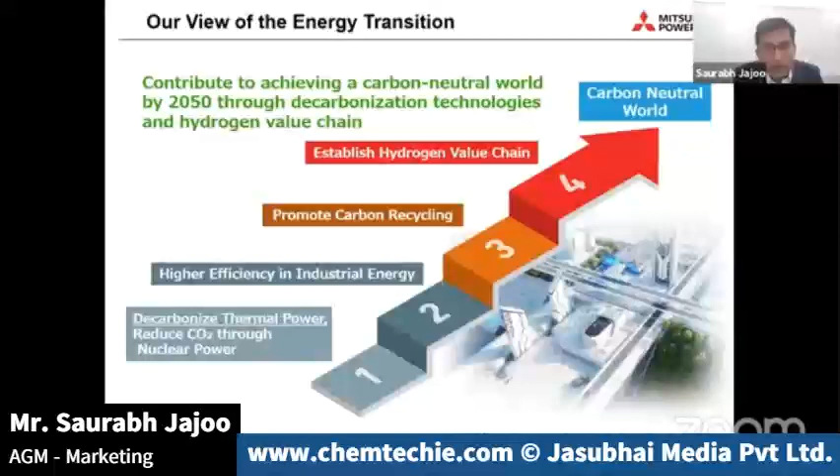To elaborate more on decarbonization, Mitsubishi Power is working on ammonia and biomass co-combustion boilers with a target to achieve carbon reduction to the extent of 20% at least. We also have a fleet of highly efficient gas turbines; our current gas turbines can demonstrate even up to 64 to 65% efficiency.

As we all know, gas turbines, in comparison to coal-based power projects, almost reduce CO2 by 60%, 65%. So basically, with improvements in gas turbine technology and more deployment, we can definitely achieve decarbonization of the coal fleet, and that can be a good contributor. Combining these gas turbines with coal-based power projects, and coal-based power projects with CCUS, will definitely reduce carbon emissions to a great level.

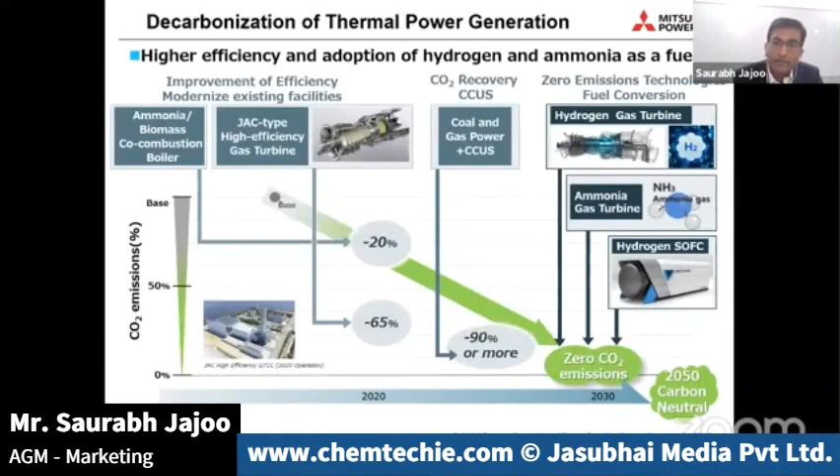And subsequently, as I explained earlier, we have to move towards hydrogen-fired and ammonia-fired gas turbines. Yeah, Mr. Prasad, you can take it further.

In this slide, we are trying to show you the portfolio of gas turbines that we are offering from Mitsubishi. On the right-hand side, you can see gas turbines varying from 41 megawatts in simple cycle to almost 574 megawatts in simple cycle, so we have a wide range of gas turbines in our portfolio. On the left-hand side, you can see the various models plotted against combined cycle efficiency and turbine inlet temperature.

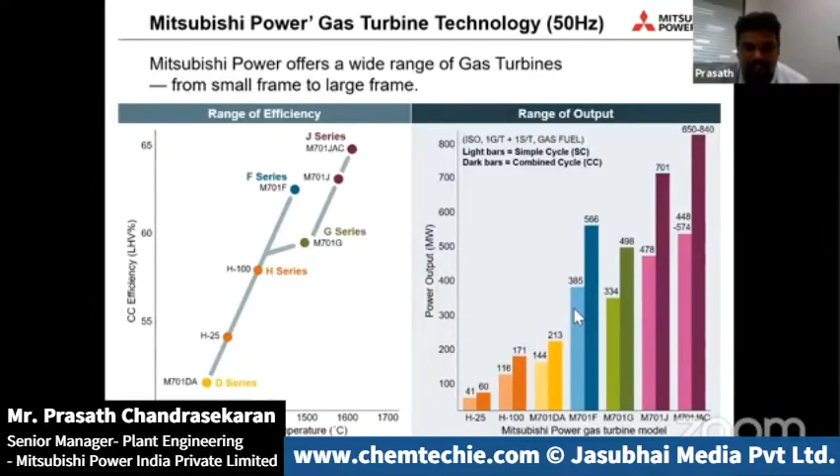If you see the topmost, the 701 JAC gas turbines and J series, you could clearly see that we have achieved a higher turbine inlet temperature of more than 1600 degrees C, which has led to higher combined cycle efficiencies in our advanced frame gas turbines.

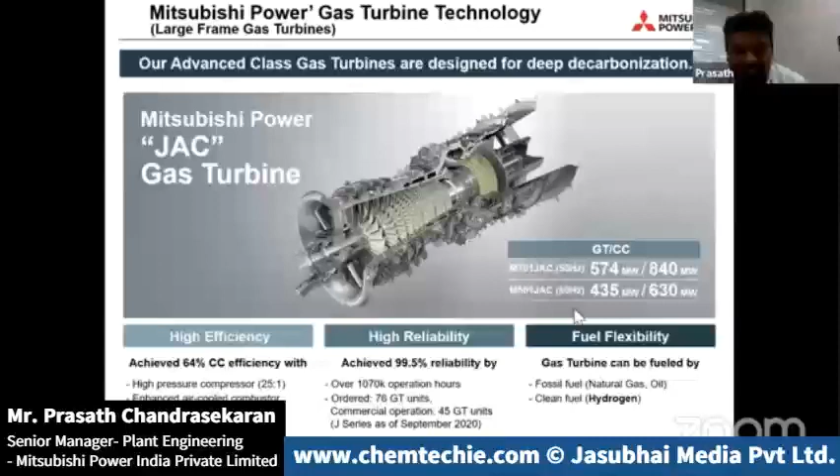One of our advanced class gas turbines is the JAC, which we call the Jack gas turbine. With this gas turbine, we have achieved 64% combined cycle efficiency, and we have a track record of 99.5% reliability. This gas turbine will be used for fuel flexible operation, where we can use both fossil fuel and clean hydrogen. Currently, with the current combustor setup in this gas turbine, we can accommodate 30% hydrogen, and slowly, in a phased manner, we will be reaching 100% firing of hydrogen in this gas turbine.

In the middle range, you can see we have a gas turbine called H100, where we generate 116 megawatts. It's a twin shaft machine, and it has a lower turndown of 50%.

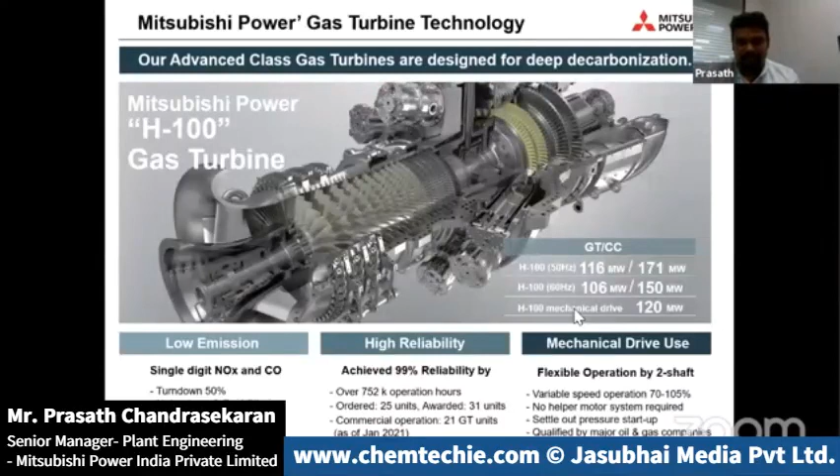And on the smaller side, we have a gas turbine called H25. This has an ISO output of 41 megawatts. And here also, we'll have the fuel flexibility of having natural gas as well as clean hydrogen in the near future.

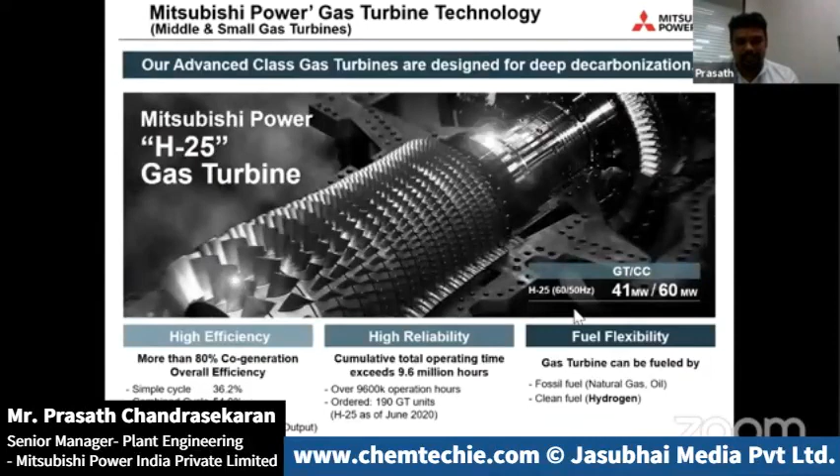We have different types of combustors to meet individual project requirements. For the large frame gas turbine, we currently have two types of combustors. One is a diffusion combustor, which is a standard combustor where we can fire 100% hydrogen. We are currently using it in one of our projects in Magnum, Netherlands, which will be commissioned by 2027.

The second type of combustor is a pre-mixed DLN combustor, which is commercially available currently, and we have already done 30% hydrogen co-firing in this combustor. The test was completed in 2018.

The third combustor, type 3, is currently in development. We call it the multi-cluster DLN. We are trying to reach 100% hydrogen firing by March 2025 with a turbine inlet temperature of 1650 degrees C. So these are the combustors for the large frame, and the type 3 combustor under development will be available from March 2025.

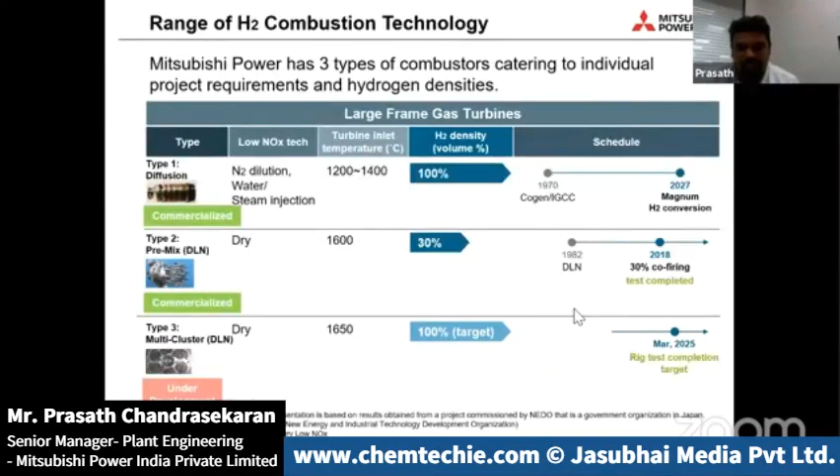Next slide please. When you come to middle and small gas turbines, for the H25 gas turbine, a 41 megawatt gas turbine, we already have the diffusion combustor, which is commercialized. For the DLN combustor, our current DLN combustor can accommodate 30% hydrogen. We did the testing in 2019.

For the future, we are currently developing a DLN combustor which will reach 60% co-firing by 2022. And by 2024, we will be able to reach 100% firing in the H25 gas turbine.

Similarly, in the mid-range gas turbines, we call it H100, around a 100 megawatt gas turbine. We currently have a gas turbine with a pre-mix DLN combustor that can accommodate 30% hydrogen. Under development, we will have one more multi-cluster DLN combustor, which we are targeting to complete by late 2020s. Next slide please.

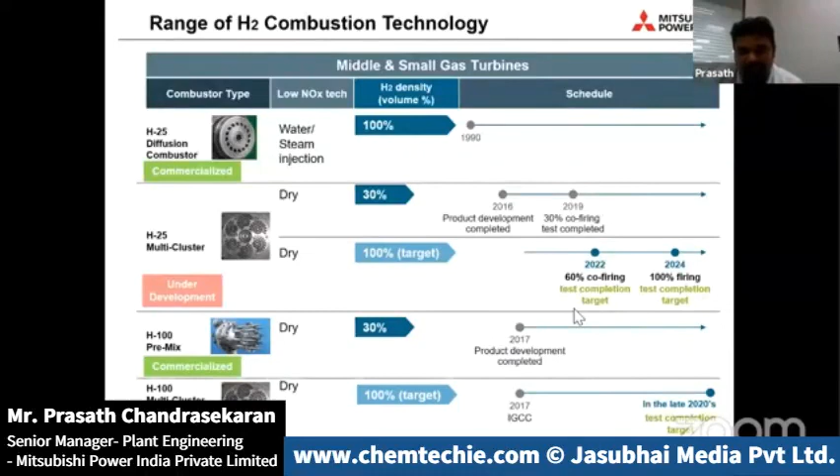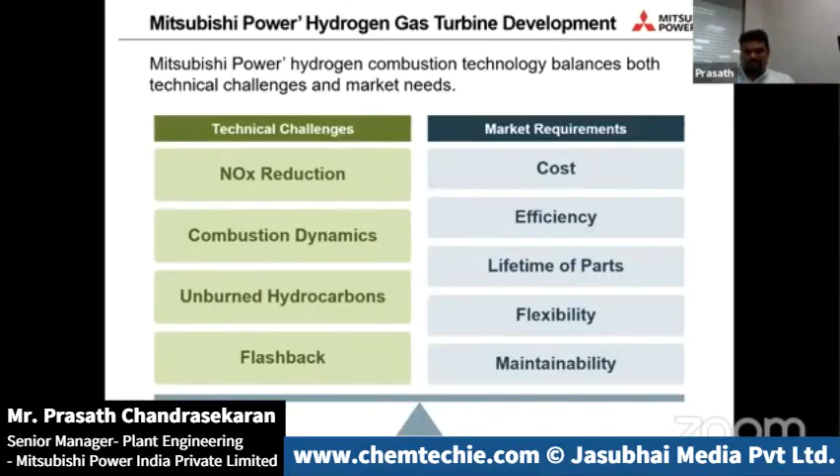In order to develop this hydrogen combustion technology, Mitsubishi Power is trying to balance both technical challenges and market needs. On the technical side, the major challenges in hydrogen gas turbine development are NOx reduction, combustion dynamics, unburned hydrocarbons, and flashback. On the market requirements side, we have to face cost, efficiency, lifetime of parts, flexibility, and maintainability. We are trying to balance both the technical challenges and market requirements to develop hydrogen gas turbine combustion technology.

For our advanced hydrogen combustion technologies, our motto is for the customer to have minimal investment. For example, an existing customer with a gas turbine has to do minimal modification to accommodate 100% hydrogen. That is the only motto through which we are working currently. All our gas turbines can accommodate all carrier-agnostic hydrogens, whether hydrogen in the form of ammonia or liquid hydrogen. We wanted a gas turbine which can accommodate all types of hydrogen.

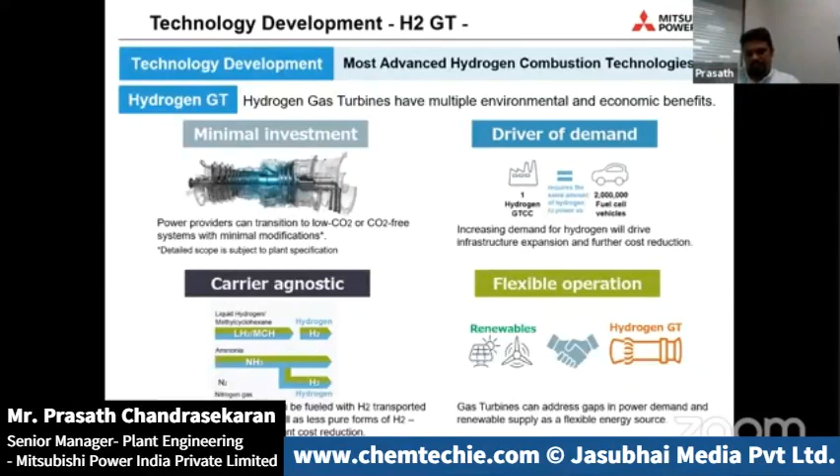From a flexible operation point of view, we are also developing hydrogen for advanced fluctuations in power demand, such as when clubbing with renewable supply, where flexible energy is required from a gas turbine, which you will readily have using our advanced hydrogen combustion technology. Next slide.

Now I'll move on to the ammonia direct combustion gas turbines. Hydrogen customers may have hydrogen directly, or some may have it in the form of ammonia.

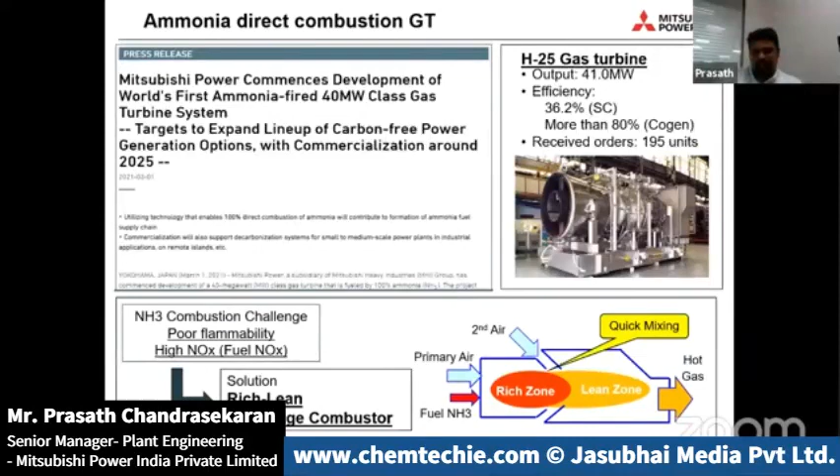For customers who have ammonia, we are trying to have a two-stage combustor with a rich zone and a lean zone. Ammonia has poor flammability and produces high NOx, so we are introducing a two-stage combustor. This will be used in our smaller gas turbines, the H25 gas turbines, where we will fire ammonia directly.

If the customer has ammonia as a hydrogen carrier and wants to go for a large frame gas turbine, our technological offering is to use the exhaust gas from the gas turbine to crack the ammonia and separate it into nitrogen and hydrogen, then use the hydrogen in our hydrogen combustor. This is for large frame gas turbines.

For the small frame gas turbines, as said earlier, we will have a two-stage combustor where we fire ammonia directly and generate power, then have an SCR in the HRSG setup to reduce NOx. This is how we are framing the setup for high efficiency large frame and small frame gas turbines when ammonia is the carrier fuel.

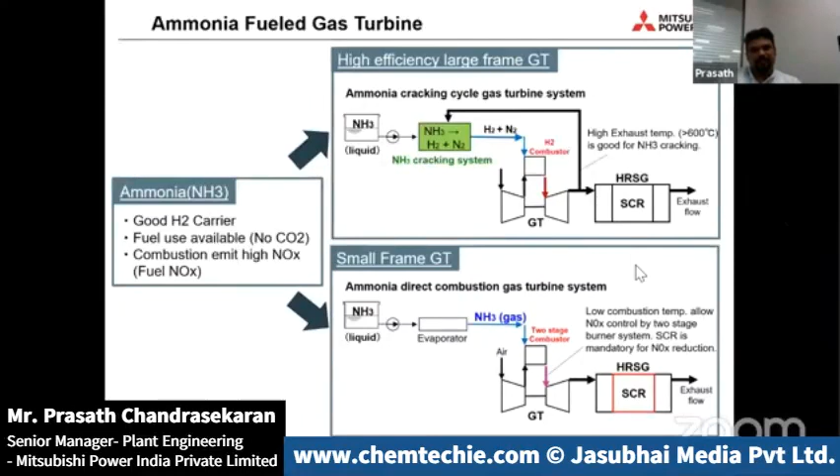This is the timeline for ammonia. For the smaller H25 gas turbine, the combustor development, SCR development, system study, demonstration, and commercialization - we are planning to commercialize this smaller gas turbine with direct ammonia firing by 2025.

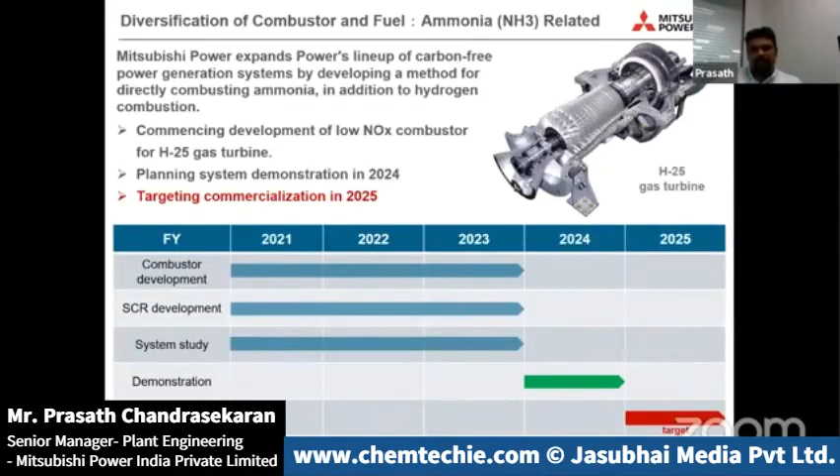Now to give a brief overview of some projects where Mitsubishi Power is already working on hydrogen gas turbines. This project is known as H2M, hydrogen to Magnum, located in Netherlands. Mitsubishi Power has already supplied 3 gas turbines to this project, which have been working since 2014.

Now one of the gas turbines, the F-class machine, will be converted to fire 100% hydrogen, with timelines around 2027. The hydrogen available will be blue hydrogen supplied by Equinor, and the main motto of this project is to kickstart the hydrogen economy in that region and also achieve CO2 reductions. Eventually, when the hydrogen economy kicks off, the hydrogen will be used for transportation and other purposes. That is the concept stage.

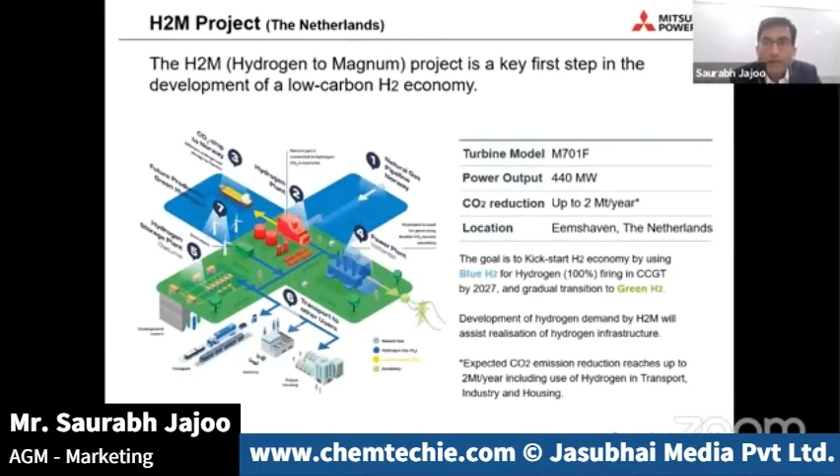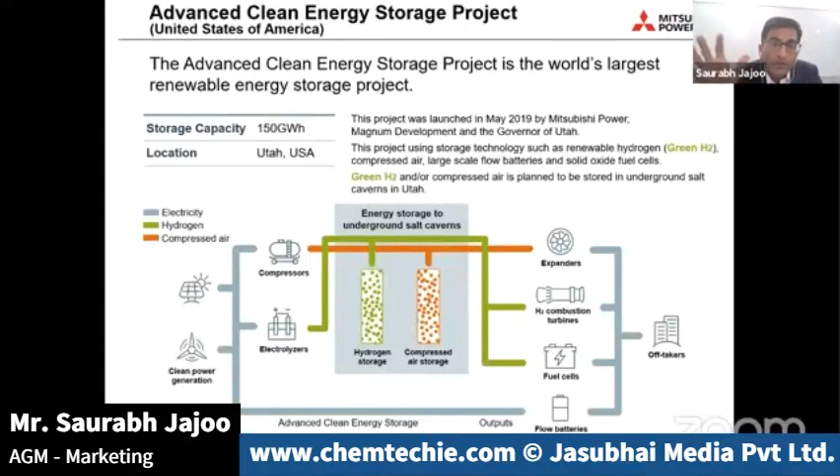Adjacent to this project is another project, the Intermountain Power Agency. This is an existing coal-based power project of 1800 megawatts, and Mitsubishi Power will be supplying their advanced J-class machines, JAC machines, which will completely replace the existing coal-based power project. The target is to start hydrogen firing, using clean hydrogen available there, by 2025, up to 30%, eventually increasing to 100% by year 2045. This power plant will supply energy to Los Angeles through HVDCs.

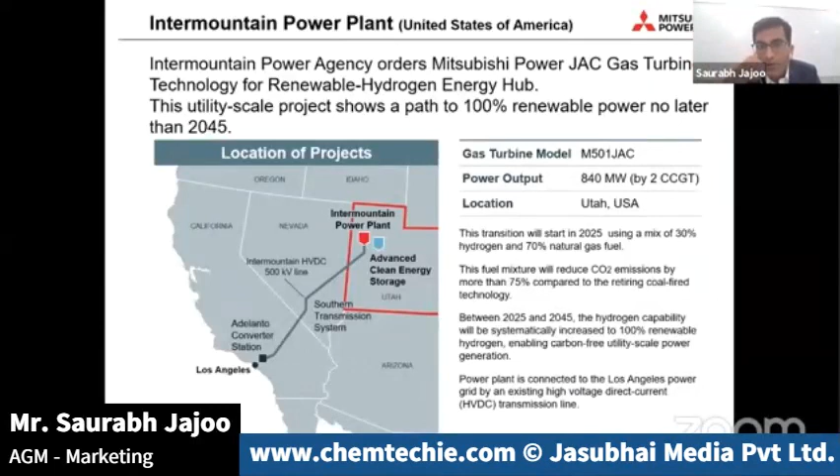To summarize our presentation, we believe that gas turbines will be essential to maintain reliability and stabilize power supplies in the energy transition process. Hydrogen will be required to deeply decarbonize gas turbines, and Mitsubishi Power is committed to the hydrogen economy. Thank you very much for patiently listening, and we are open for any questions.